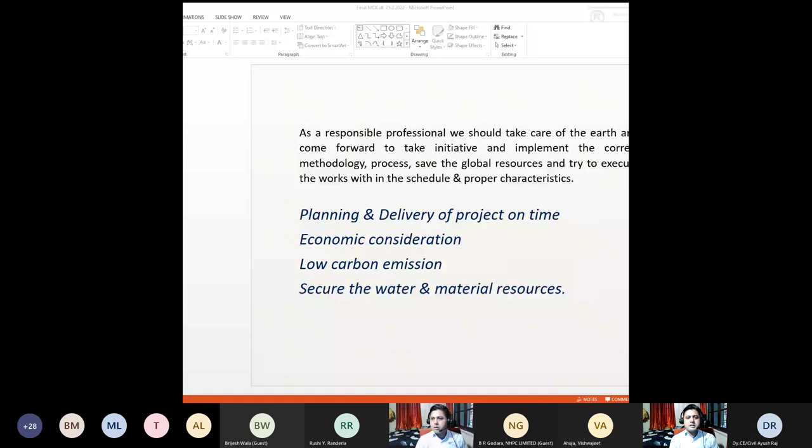Yes, sir, go ahead. Delivery of project on time, economic consideration, low carbon emission, and securing water and material resources - because if we do the projects and don't deliver on time, it is very difficult to sustain in the market, being a contractor, a client, an organization, or a person. If you are the person who can deliver the project with proper planning, proper thought process, thinking, analysis, and root cause analysis, the company and organization can benefit in all respects. So your planning and everything should be considerable, and the methodology, the process should be reusable, and all results should be.

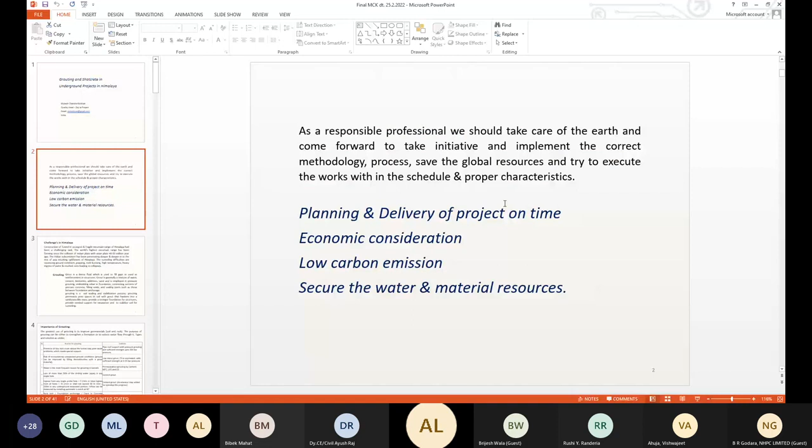Challenges in Himalaya: construction of tunnels in the youngest and most fragile mountain range of Himalaya has been a challenging task. The world's highest mountain range has been forming since the collision of the Indian plate with the Asian plate 40-50 million years ago. The Indian subcontinent has been penetrating deeper and deeper into the rest of Asia, resulting in upliftment of the Himalaya. The tunneling difficulties are squeezing ground condition, popping, rock bursting, high temperature, heavy ingress of water, and crushed zones leading to collapse. These are the challenges while we execute projects in Himalayan terrain, whether it is hydro projects, tunneling projects, metro, or any kind of structure.

So grouting and shotcrete is what I'm going to focus on today - my experience, as a team, as a whole organization, where I have thought it should be done in a proper way or good way. So I will share my entire experience and key details, key experience, which may benefit the industry and the society.

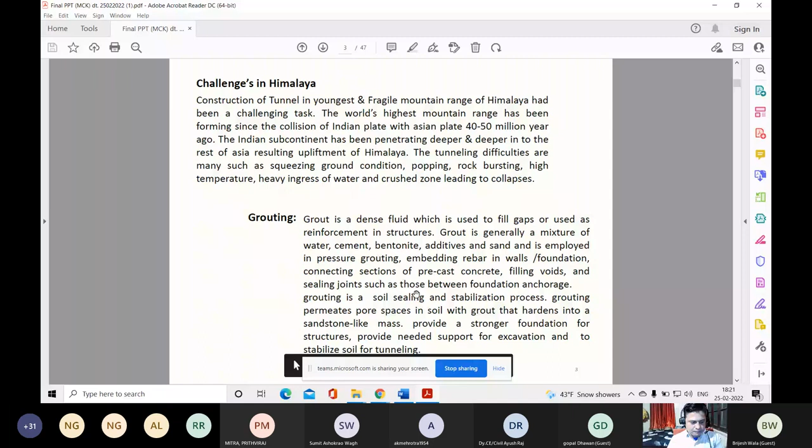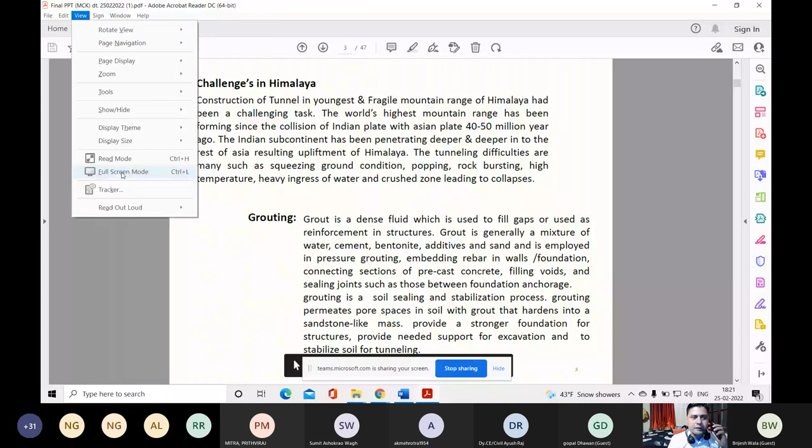Yes sir. Hello. Sir, you are audible sir, you can continue now. Okay okay.

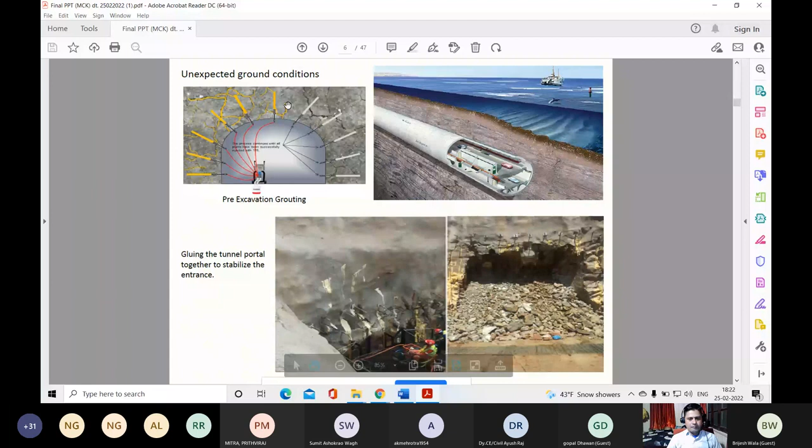Can you go back on previous screen? Hello. Hello. Yes, you are off, move. Yes please move to next slide. Please move to next slide.

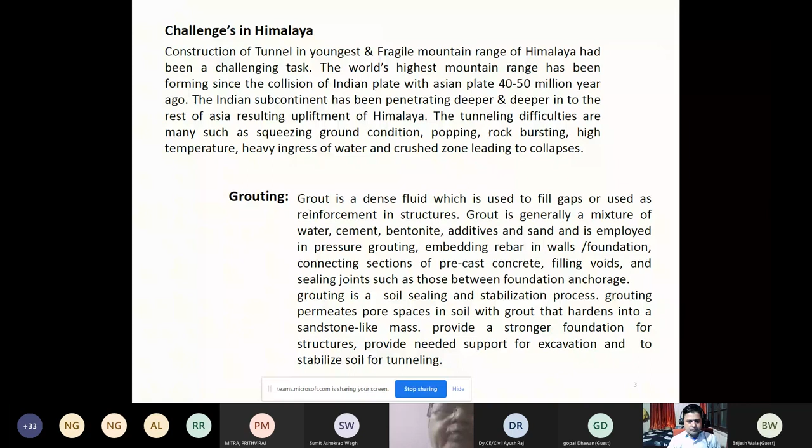Please play the video for ground condition.

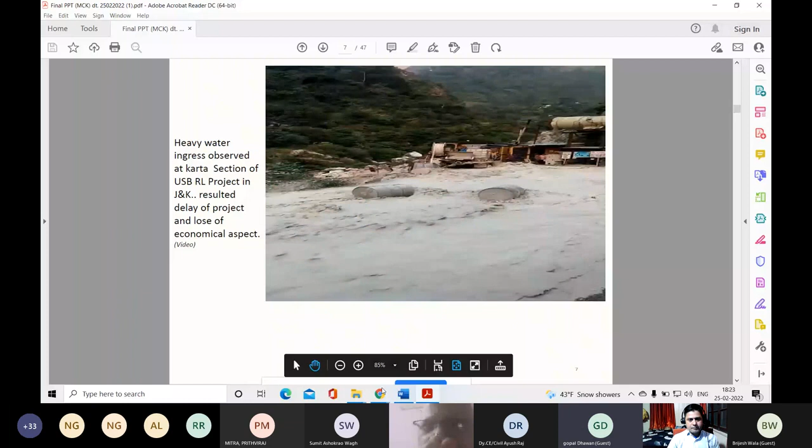Thanks sir, thanks. Due to network problem I am extremely sorry, I got disconnected. Now I am talking on the reason for grouting and solution. The presence of low rock cover needs proper support.

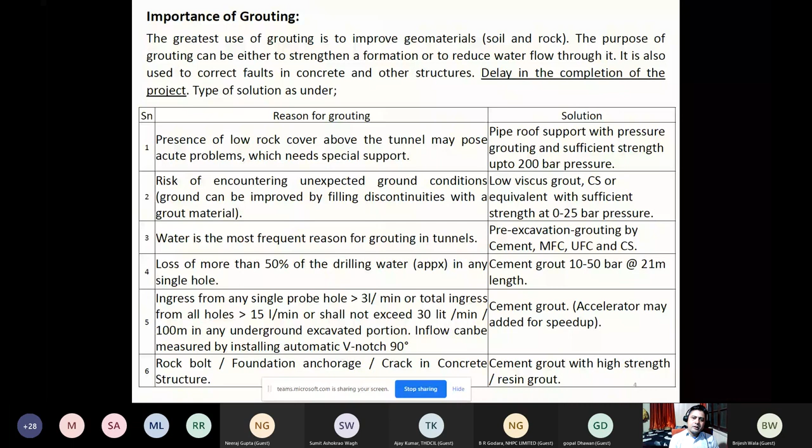So I have seen in some railway projects and RVNL also, there is a good design philosophy and a constructive and faster excavating approach and procedure they are implementing, which you can see.

Just touching the boomer and it is falling down. So whatever condition exists in nature, you have to take the correct pre-excavation methodology, what type of grouting is suitable in that condition, pipe roofing and other elements like RRS, rib and lattice girder, shotcrete, grouting - everything should be done properly.

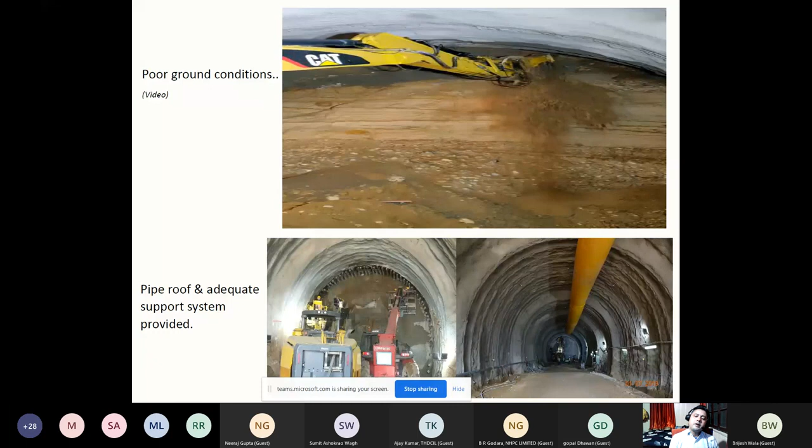You can see the next slide, which is showing the tunnel under the sea. Why do we do tunneling? Because there is no space, no land in Norway. I am talking about Norway, and almost all tunneling there, I think 90%, is going under the sea.

In this condition, we have to implement and go with the grouting. Pre-excavation, you can see gluing the tunnel portal together to stabilize the entrance nicely. The drilling, anchoring and grouting has been done nicely. The face has been excavated in poor ground condition, highly fractured.

It's not only in Norway - in Uttarakhand, Himachal and hilly terrain also, we have to study the condition at the face, whether it is cavity, whether it is solid, whether there are water bodies. We have to take care of nature and the people residing in Himalaya or mountains - they have to survive with water, and the water is key.

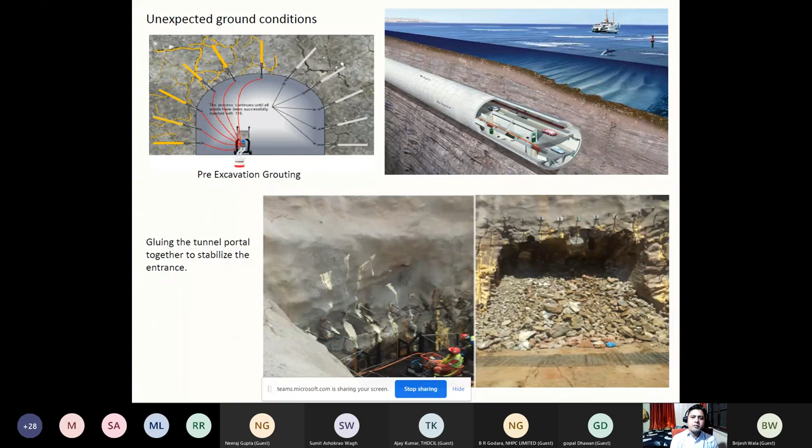Water is a key component for survival, so we have to take preventive measures during tunnel excavation, because water is a hazard for tunnel construction. We have to try the best possible measures to grout it and expedite progress, while also keeping nature as it is, because we are not paying nature back - we are deteriorating it while doing progress and executing works to achieve our targets and goals.

I have a case study of a railway project in Jammu and Kashmir, the USBRL project near Katra, Udhampur. There was a huge water body encountered in the tunnel, and a waterfall was observed inside the tunnel. Maybe the reason was improper planning, maybe the reason was not doing proper geological and water investigation when the tunnel was planned and executed.

So we have to always think before execution what type of challenges and preventive measures need to be taken. This is case study one - when tunnel excavation is going on, no surprises should come. All challenges and unforeseen consequences should be analyzed before the time schedule.

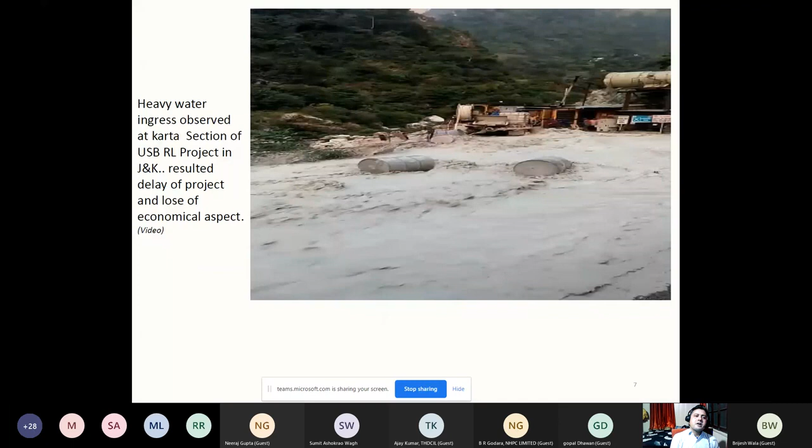Case study 3: in the 90s, excavation of the original headrace tunnel encountered a heavily faulted zone with an overlying river valley, where rock cover decreased to only a few meters with overlying saturated river-borne deposits. At the time of original excavation, a cave-in and severe water ingress were encountered in this zone, leading to tunnel collapse and resulting in heavy project delay. This is the case of Maneri Bhali HEP second stage.

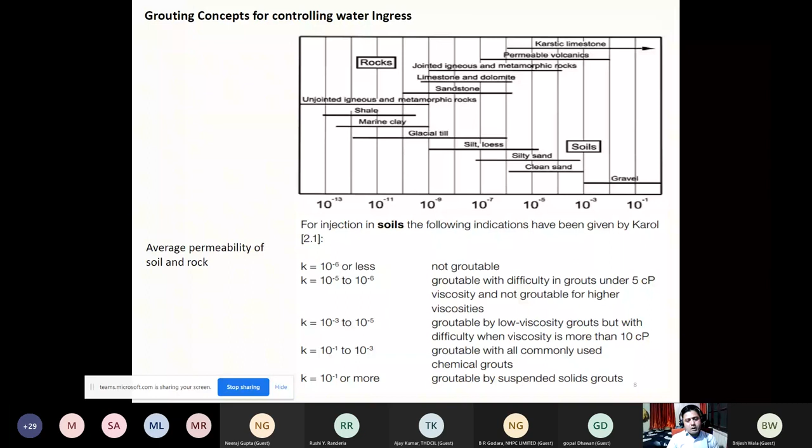We have to drill. You are visualizing on screen this kind of fractured, highly fractured rock. If you go ahead 50 or 100 meters, water bodies may come into the tunnel - maybe a big problem. During excavation, your water may be lost, penetrating into the fissures and holes, so you have to grout it immediately. You have to calculate the lugeon value - you drill and measure the flow rate per minute, pressure, and depth of the hole, and you can calculate the lugeon value.

Another concept is the grouting procedure: how you identify which grout is suitable for which class of rock or soil. If your tunnel face has stone, gravel, sand, or silt, you can go ahead with materials like cement and mortar, or bentonite, sand and gravels. Nothing is required in rock.

If sandy and silty strata is observed, you may go ahead with cement initially. If not possible, you may go with microfine, ultrafine, and colloidal silica, which has been experienced and worked with in recent years. Last two years I have also worked with some kind of grouting specification technology.

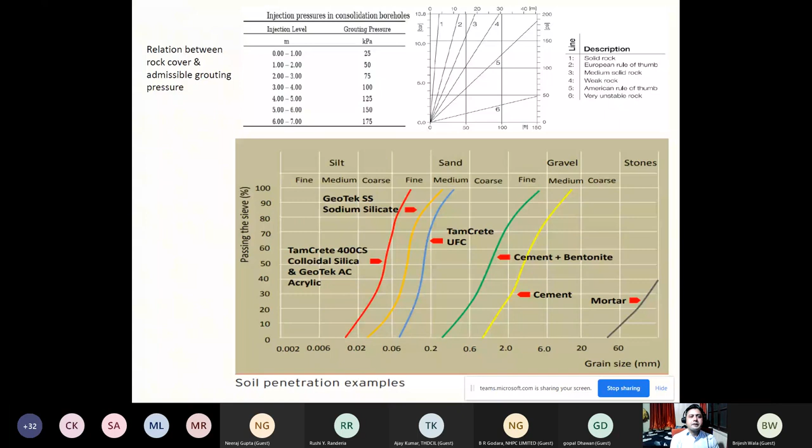There are some soil grouting methods: compacting grouting, permeation grouting, fracture grouting, mixing jet grouting. I will not go into detail, I will be a little faster, because it's just the type of grouting in soil which we are treating and permeating, and which type of material you are pouring.

For OPC, you can treat 0.4 mm size fissures. For 0.1 mm fissures, you can go with MFC. For 0.05 mm, like 50 micron size fissures, you can go with ultrafine.

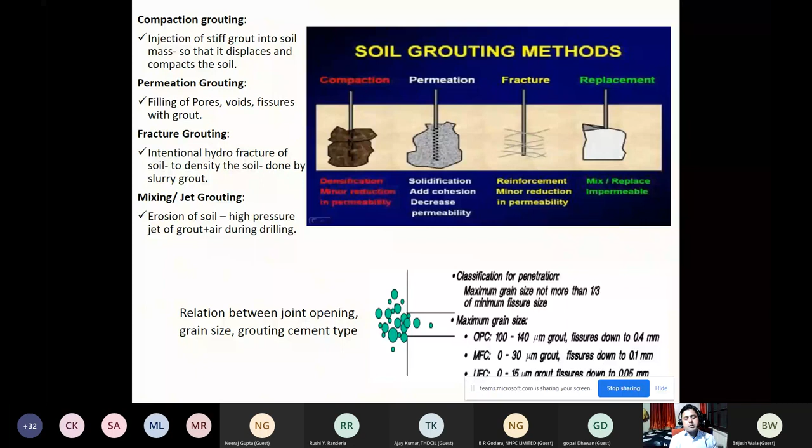Size, again, size is a matter. You can see the funnel, similar to a Marsh flow apparatus, where you put cement, microfine and ultrafine. The cement particles will be higher size, like 50 microns or 40 microns. It will not pass through the tube.

So you need the particle size finer when your crack size is 0.02 mm. If your crack size is lesser than 0.02 mm, the size of material you are pouring, like microfine or ultrafine, matters—microfine is defined as below 30 micron, and ultrafine as below 15 micron. There are other materials on which research is going on.

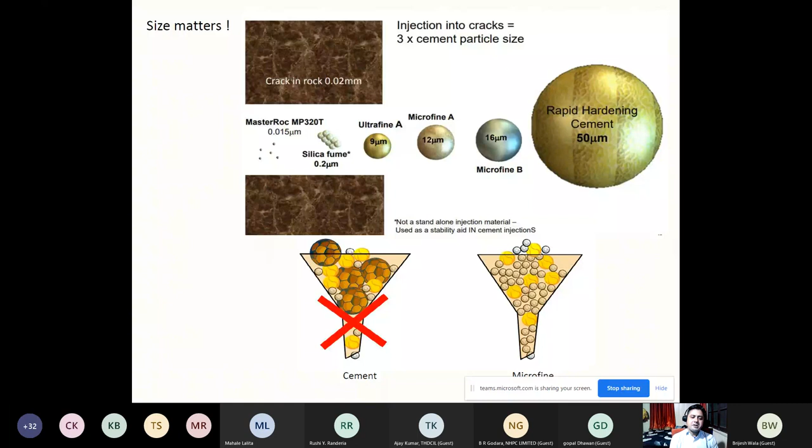So all these materials are beneficial, and you can examine them through rheological tests. What is a rheological test? Stable cement grout behaves like a Bingham fluid. Therefore, both viscosity and cohesion need to be measured to provide a complete picture of the rheological behavior. The most common method of assessing the rheological behavior of cement grout in the field is to measure the time it takes for 1 liter of grout to flow through a Marsh cone or funnel.

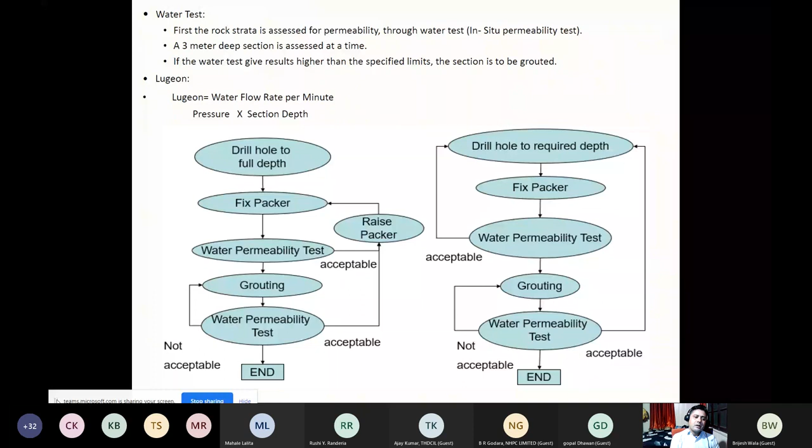Bentonite is used for ground stabilization. Basic purpose of bentonite: liquid limit will be 300%, and pH between 8 to 10.5, swelling by volume 10 to 12 times original volume. Grain size: 0.02 mm more than 85% should pass, 0.2 mm 99.9% pass, and 2 mm 100% should pass.

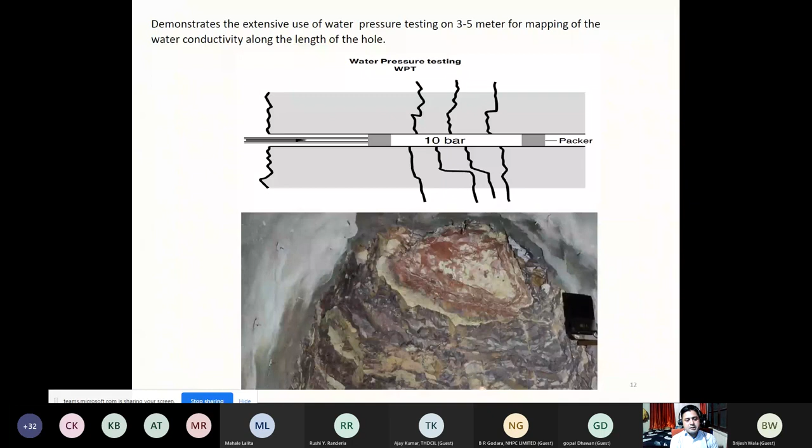Polyurethane is used for consolidation of sheared or disturbed rock, making the ground impermeable against water inflow even under high pressure, with high fire resistance and low permeability, which will produce a low strength grout that may be very difficult for an initial cutoff from running water. Polyurethane can be done, but it is not advisable because it is a waste of time and results from improper planning, because when we do pre-injection grouting through cement or microfine, this condition will not happen, so there's no need to use polyurethane grout.

Epoxy grout we'll discuss again on the next slide, but it is a low viscosity epoxy resin with long pot life, used for crack injection, sealing cracks in concrete and restoring structural integrity.

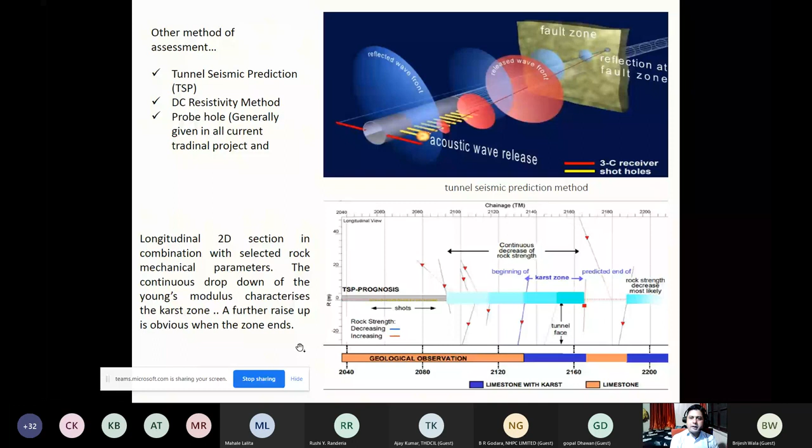Chemical composition: microfine and ultrafine grout is basically cement, but it has the size to determine whether it is microfine or ultrafine. It has the basic percentage of ingredients like C3S, C2S, and C3A, and other parameters similar to this. This table shows microfine and ultrafine properties. Cement is basically the ingredient for microfine and ultrafine purpose of stabilization. Both provide water permeability control and good strength improvement. The difference: microfine D50 will be below 4 micron, D95 below 15 micron; ultrafine below 3.5 and below 12 micron. Specific surface: microfine 600 meter square per kg, ultrafine 900 meter square per kg. The mud balance is similar to density, 1.4 to 1.5.

The Marsh value may vary with different water cement ratio and admixtures. If you increase the amount of admixture plasticizer, your Marsh will be different—Marsh value will be different. This is practical, established data: 30 to 34 is okay for penetration, and the mass flow of 0.8 we have established in past projects. Bulk density for microfine will be 800 to 1500, and ultrafine 500 to 800.

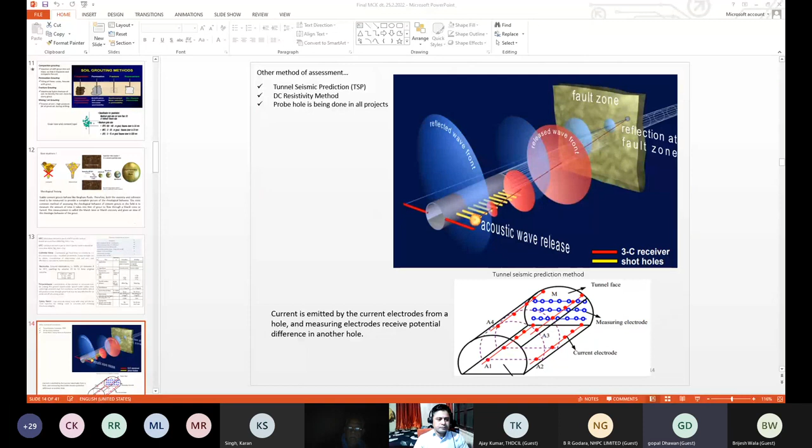We have done so much face study of grain size analysis. We found that sometimes normal cement OPC, below 300 meter square per kg fineness, would not be good for the grouting. So we tried 53S grade, meant for special category like sleepers, which is more fine cement. We did some pipe roofing and rock bolting grouting, but for this kind of strata where fine grained soil of 150 micron size sand exists, we needed to find which grout will be feasible. There we found some bonding between soil and grout was observed, and it was stable at some time, because the stand-up time during excavation is very less compared to rock.

Again, we did the ultrafine grout with the plasticizer PCE chemical at one phase. There were cobbles and pebbles between the particles. It works, but it takes time, like 4 to 6 or 7 hours, and it gives some strength after some period. One sample gave 2.2 MPa, another 1.2, and another 2.2. This is the composite taken from the face sample. You can see this is the flowing grout into the pebbles and gravels at face, poured by the pipe roofing umbrella, and it worked out after 4-5 hours. It was a hardened surface, very hard, and then it was not breaking sometimes even by the excavator. So the ultrafine was successful in that case.

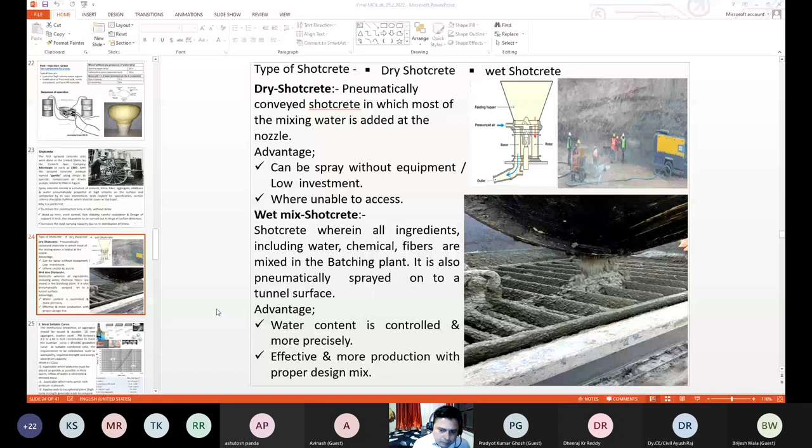Keep coordination with the screen. Now I am on most suitable curve. Are you watching this slide? Can you see this? No, sir, you're still on types of shotcrete, it is being displayed. Most suitable curve, pardon? Yes, now sir, you are on most suitable curve.

Yes, okay sir, this is the mechanical properties of aggregate. We have to always keep in mind when shotcrete has to be designed with proper strength requirement, with parameters for different grades, our gradation curve should fall within the envelope, because if the percentage of aggregate is not coming into the curve, the shotcrete strength and other parameters as per contract will not be achieved. So you have to ensure the aggregate gradation curve falls within requirement.

Then what is J1 class? It is basically applicable when shotcrete must be placed as quickly as possible in thick layers, where inflow of water is observed and stresses occur. What is J2? Applicable when early active rock pressure is present. J3 applies only to exceptional cases. High early strength generally leads to reduced strength increase at later age.

Not in the screen. Nothing, only number 2, most, that is the most suitable curve. After that nothing, what is that? What you are telling is not being displayed. Whatever you are telling. Now it is clear, sir. No, it is there, but what you are telling is not matching the display.

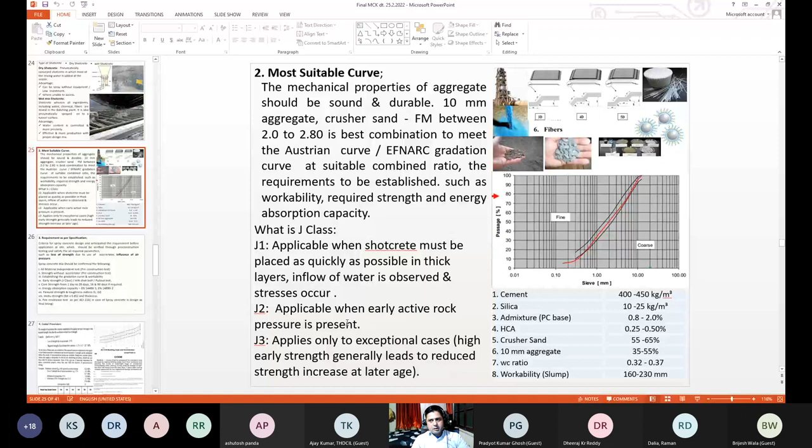Continue, please continue.

Requirement criteria for spray concrete: designed and anticipated requirements before application at site should be verified through pre-construction testing and satisfy all requirement parameters such as loss of strength due to use of accelerator and influence of air pressure. The following tests should be done during pre-construction testing, before use at site: all material tests, independent tests, strength without accelerator to be established, establishing the gradation curve and workability, early strength, Hilti shortboard and pull-out test.

Early strength can be done using the penetrometer, but for the Hilti shortboard and pull-out test, the equipment is not available with the manufacturer. Maybe depending upon the request they may supply it.

Core strength from 1 day to 28 days should be confirmed. The energy absorption capacity as per EN should be confirmed. The flexural strength and toughness indices I5, I10 shall be checked. In situ strength shall be 0.85 of the characteristic strength, and fire resistance as per ACI 216 in case spray concrete is designed as final lining shall be done. So these are all essential parameters to be considered.

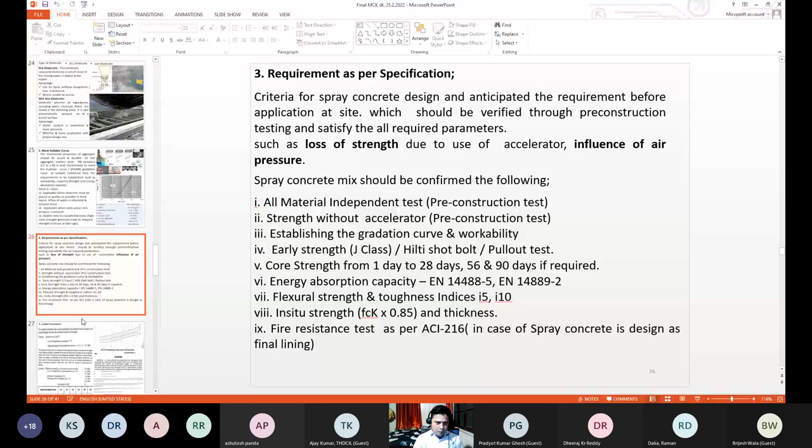So I am now going on to codal provisions. The shotcrete should be considered for loss of strength due to accelerator and due to air. You can see the screen.

There are Austrian guidelines and European codes stating that 15% loss will occur due to liquid accelerator, and 10% loss due to the influence of compacting. So a 25% overall percentage of reduction will be considered.

For example, if your strength grade or class is C30, it should be 38 MPa at 28 days. This is the J1, J2 which we discussed earlier, and this is about the ACI 318 code, which states that if 40 MPa is the grade of shotcrete, the cube strength should attain 40 MPa, 0.8 should be attained on cylinder, and 0.84 should be attained in in-situ sample.

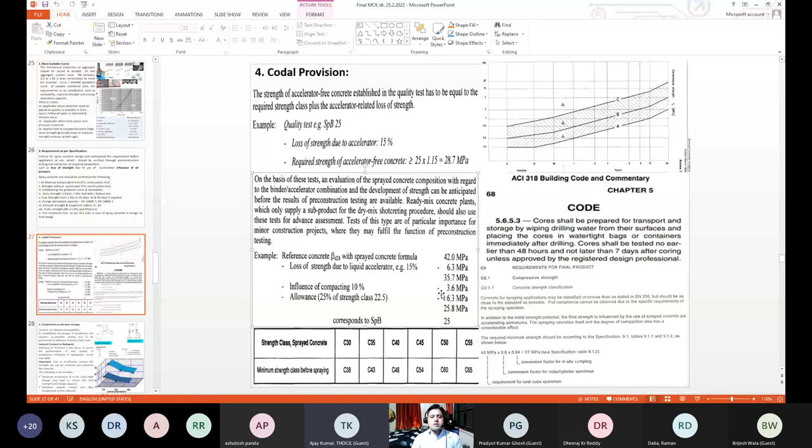Now I am on established accelerator doses. While designing the shotcrete mix at the lab, we should keep in mind that the accelerator should be used at appropriate doses. If accelerator is used more than the recommended doses, your strength will be higher and shotcrete operation will be okay, but the shotcrete will be in a burning stage, and later on the strength will not be achieved in situ. So you have to establish this through the Vicat apparatus or Gilmohr apparatus. The recommended setting time for shotcrete is maximum 4 minutes, which should be desirable and acceptable.

Cement content versus rebound: rebound of shotcrete is a key factor to assess the performance of the mix, quality of accelerator, efficiency of equipment, and nozzle man skill. All work together to achieve good results. Due to insufficient cement, strength cannot be achieved and rebound is influenced. The following should be considered: optimum accelerator to be used, as high doses may lead to reduced final strength, and optimum cement content with silica doses helps in less rebound.

This statistic is about cement: if you use more than 450 kg cement, that will be economical wastage, but your rebound will be found at wall 7% and at crown 15%, meaning overhead rebound at 15% with 450 kg. If your cement content is lesser, 375 kg, then your wall rebound will be slightly higher at 16%, and overhead may be 29%.

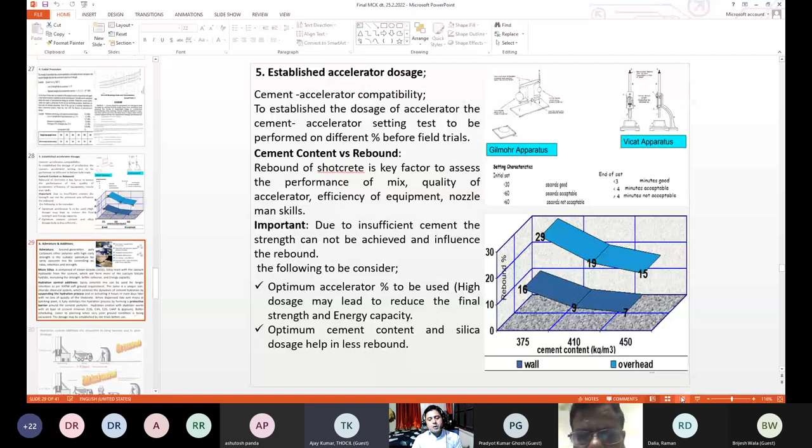Now I am on admixture and additive. I will not go in details, just go a little faster, because admixture you all know about. The second generation polycarboxylate or naphthalene based chemical with high early strength is the suitable admixture for spray concrete mix for controlling WC ratio, retention and strength.

Microsilica is composed of silicon dioxide. Silica reacts with the calcium hydroxide from the cement, which will form more calcium silicate hydrate, increasing the strength, better cohesive and energy capacity.

When dispensed into the mix at the batching plant, it fully stabilizes the hydration process by forming a protective barrier around the cement particles. Hydration control with stabilizer works with all types of cement material, C3S, C3A, C2S. It allows better scheduling and easier planning.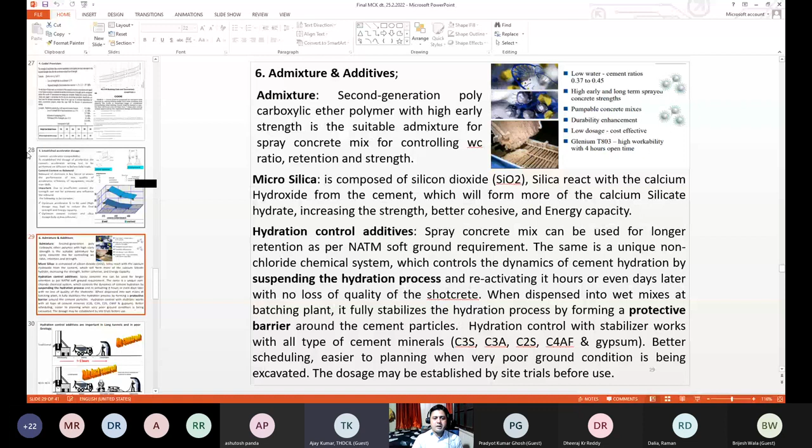When very poor ground condition is being excavated, the doses may be established by site trials before use, and you can assess the final results after establishing the same through field trials, which may be called field suitability trials. Now, hydration control additives are important in long tunnels and in poor geology.

Traditionally, you can see the batching plant is near and you have to spray immediately within 1 to 2 hours. But with the HCA, you can go up to 3 to 72 hours. You can make the mix at the batching plant and put the hydration control additive spray at site as and when required.

Because in NATM soft ground condition, the shotcrete should be prepared and readily available at site while spraying the excavating face. Once, or in case of any failure or problem persists, then you can immediately spray the shotcrete over the ground. So this is the advantage of HCA, hydration control additives.

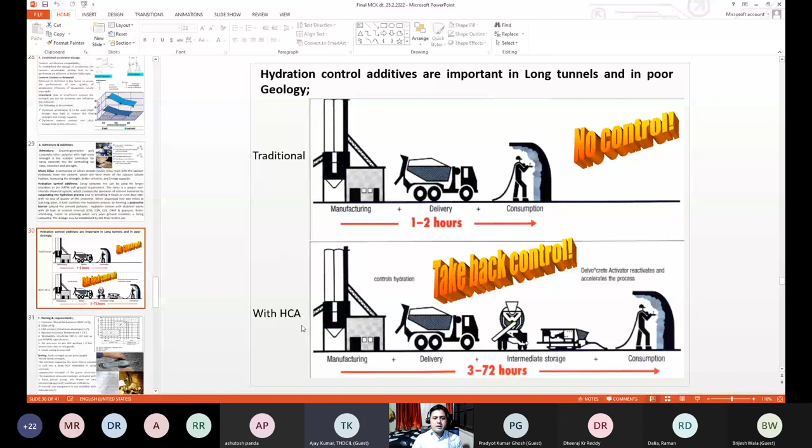Now I'm on testing and requirements. Fineness should be between 3,500 to 5,000 square centimeters per gram for cement. C3A content should be more than 7%. Spray shotcrete temperature should be more than 13 degrees centigrade. Workability should be 160 to 230 mm as per EFNARC.

It has been mentioned, air pressure, you have to, as a better engineer and a good shotcrete operator, keep the optimum pressure always. Where the rock class is good, keep 6, 7, 8 bar pressure for shotcrete, and if poor rock condition or geology, he takes the decision, and 2, 3, or 4 bar is sufficient.

Initial curing is essential. Testing early strength as per photograph, tensile bond strength. This method measures the force that is needed to pull out a draw bolt embedded in spray shotcrete or concrete. Compressive strength of green shotcrete.

The maximum pressure readings, activated with hand piston pump, are shown on two pressure gauges with maximum indicated pressure. Equipment is not available with every manufacturer, but depending upon the requirement, they may provide you. It is for tensile bond strength of the shotcrete, which we previously used. Accelerator use and field suitability trials.

Accelerator, high performance alkali free accelerator for spray concrete, 4 to 8% to be used. Panel not to be moved from site before 18 hours, because due to disturbance and improper setting or delay of setting, the panel may get damaged, or your sample may give you incorrect value.

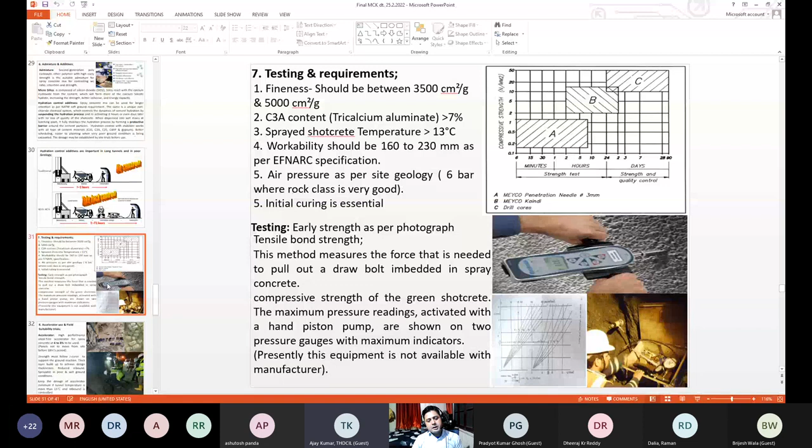Presently, at our site we try accelerator on the higher side, but it is not a good practice. Once the temperature is okay for the site or surrounding atmosphere, then you can keep the temperature of accelerator around 15-20 degrees. If it is okay, then you can use the optimum dosage of accelerator. Your optimum dosage will give you the best results.

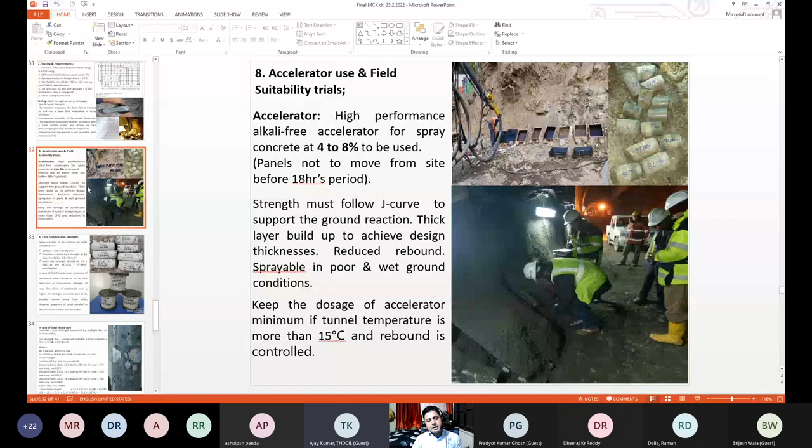Now, the core compressive strength. You know, the 28 days strength should be FCK plus 1.15 during the execution. The shotcrete routine core strength at 28 days should be FCK plus, like 30, 32, 33, it is okay.

But the strength should be FCK into 0.85 as per ACI 318 EFNARC specification. In case of steel inside the core, presence of transverse steel causes a 10 to 15% reduction in compressive strength of the core. The effect of embedded steel is higher in stronger concrete, and as its location moves away. However, presence of steel parallel to the axis of the core is not desirable.

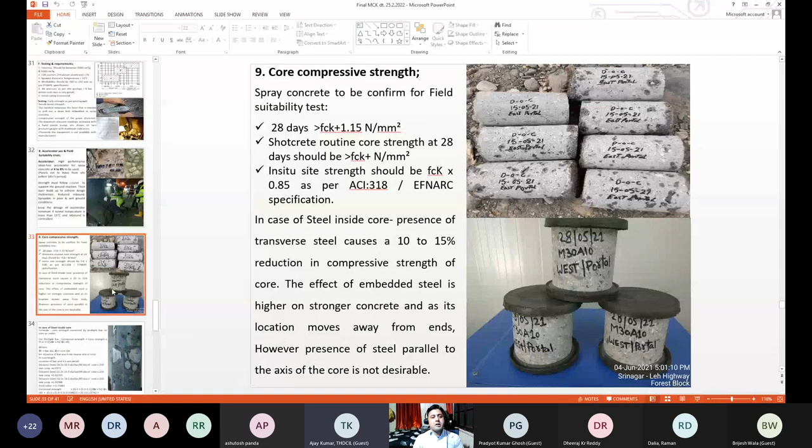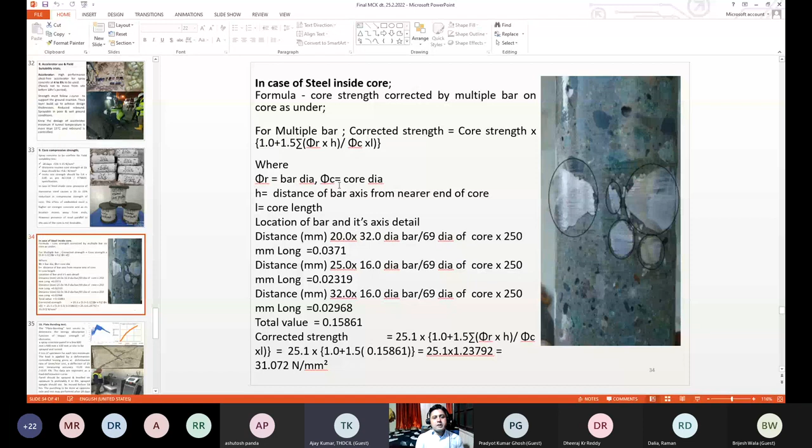Now this is the plate bending test. The plate bending test serves to determine the energy absorption function as impact strength of shotcrete. A spray concrete panel in a box 600 into 100 mm side is to be spray tested. At least 3 specimens are to be tested. The load is applied by deformation controlled testing, pressed at a deformation rate of 1 mm per minute.

A deflection of 25 mm, with measuring accuracy of 0.01 mm and 0.01 kilonewton as the machine tolerance. The data are represented as a load-deformation curve.

The panel should be sprayed and levelled at optimum percentage, preferably 4 to 8%. The spray sample should not be moved before 18 hours. The punching is to be done on the opposite side, and the test may be performed after 28 days, not earlier than that.

You are visualizing the load upon displacement. It comes directly on the screen of the machine, and you can calculate the energy, or the machine shows the energy directly, because well distributed fibers give you better energy.

In case your accelerator dosage is perfectly okay, your fiber is well distributed, and your finishing is good, you can achieve good energy, and the results can be calculated. The energy is basically the area under the load curve. So we are doing this practice, and the sampling and testing procedure is being implemented.

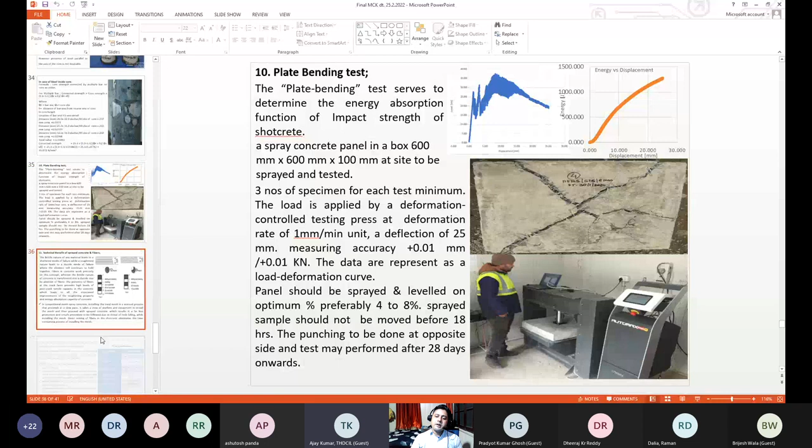What is the benefit of it? The technical benefit of spray concrete and fibers: the brittle nature of any material leads to a sudden mode of failure, while a toughened nature leads to a ductile mode of failure, where the element continues to hold together. Fiber in concrete works precisely on the concept wherein the brittle nature of concrete is transferred into a ductile one by addition of fiber. The presence of fiber at the crack faces provides a high level of post-crack tensile capacity in the concrete, which leads to associated improvements in the toughening property and energy absorption capacity of concrete.

In conventional mesh spray concrete, installing the steel mesh is a manual process that proceeds at a slow pace. It takes a crew of workers and equipment to install the mesh, and then proceed with spray concrete, which results in a far less productive and unsafe procedure due to the threat of rock falling while installing the mesh. Direct mixing of fiber in the shotcrete eliminates the time consuming process of installing the mesh.

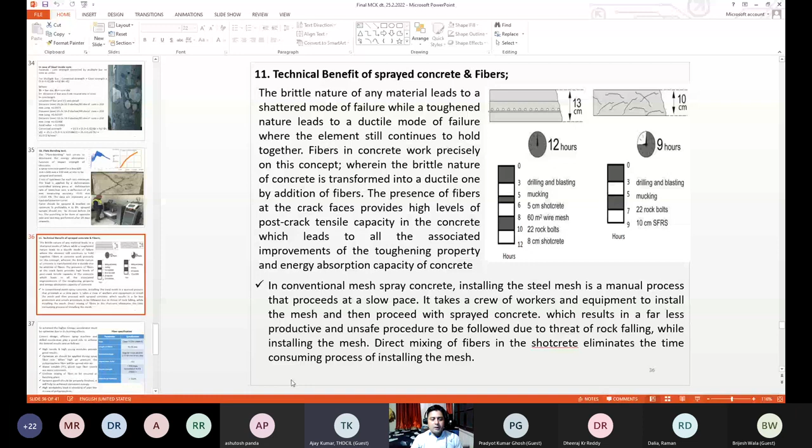Now you know that to achieve higher energy, accelerator must be optimum due to its burning effect. Fiber specification: which fiber is generally used? Class 2, 45 to 55 mm length, cross sectional shape 0.3, and aspect ratio should be more than 64. The tensile strength of the fiber should be more than 500, and the modulus of elasticity should be more than 5 GPa.

Its benefit: high tensile strength and high Young's modulus provide good results. Optimum air should be applied during spray fiber mix. With high air pressure, the polypropylene fiber will be sprayed into the air. Water soluble PF glue-type fibers and steel fibers are more consistent.

Steel fiber with the glued type is better than other non-glued fibers. Uniform mixing of fiber must be ensured at the batching plant. Spray panels should be properly finished, which will help achieve consistent energy. High workability leads to choking of the pipeline in case of polypropylene fibers.

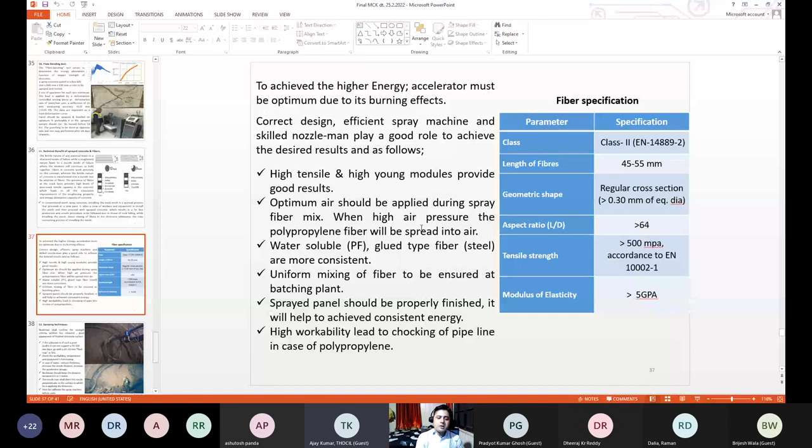Spraying technique: the nozzleman shall confirm the strength criteria to achieve less rebound and good appearance to finish the shotcrete surface. If the substrate is of such poor quality that it cannot support 50 to 100 mm layer, go with a 20 to 50 mm flash coat first. Check the workability, temperature, and equipment functioning.

In case of water, reduce thickness, increase the nozzle distance, and increase the accelerator dosage. The nozzle should keep a distance of between 0.5 to 1 meter. The nozzleman shall direct the nozzle perpendicular to the surface to which he is applying the shotcrete. The spray machine must be calibrated before use.

You can see how the operator is spraying, maintaining the proper distance and angle, and a perfect spray is observed when you have a good, skilled, and certified nozzleman.

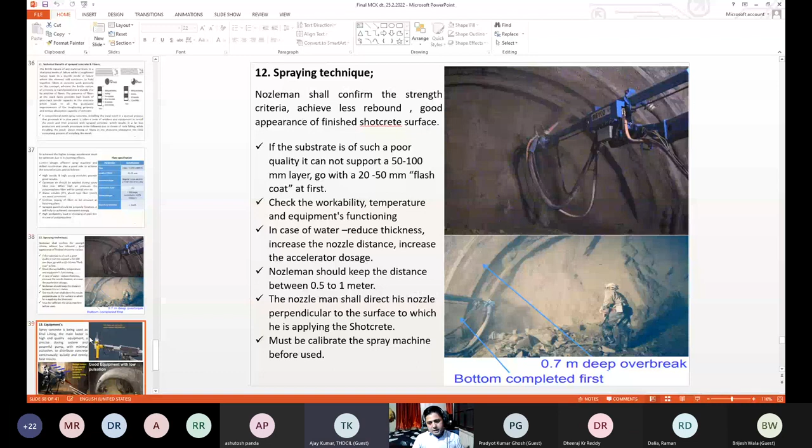Also, equipments. Spraying concrete is being used as final lining. The main factor is high-end quality equipment, a precise dosing system, and powerful pump with minimal pulsation to distribute concrete continuously, quickly, and evenly for best results. You can see the machine has 360-degree rotation of the nozzle.

The distance from the surface to nozzle should be 0.5 to 1 meter, and the angle should be perpendicular to the face. Good equipment gives you low pulsation and good results, as per what you can see on the screen.

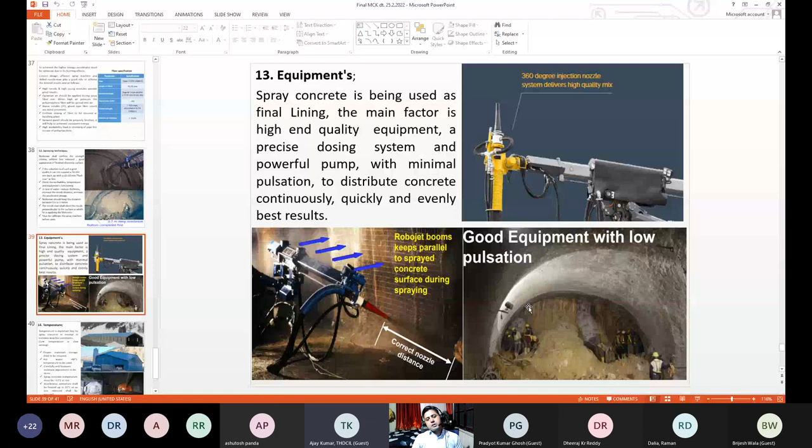Temperature is a very important factor in shotcrete. If your shotcrete is not hardened, your strength will not be achieved. Temperature is the most important key for spray concrete in normal or extreme weather conditions. Low temperature means slow setting. Proper material storage has to be ensured.

Hot water should be more than 60 degrees centigrade temperature, to be used carefully, and frequent moisture adjustment to be done regularly. Spray concrete temperature must be plus 13 degrees centigrade at site. Accelerator admixture shall be heated up to 20 degrees centigrade so that less rebound shall be ensured.

A real case study and implementation of controlling the shotcrete temperature and other parameters in extreme weather condition. As you can see by this visualized video, at minus 24 temperature you can plan a good shotcreting activity with proper quality control.

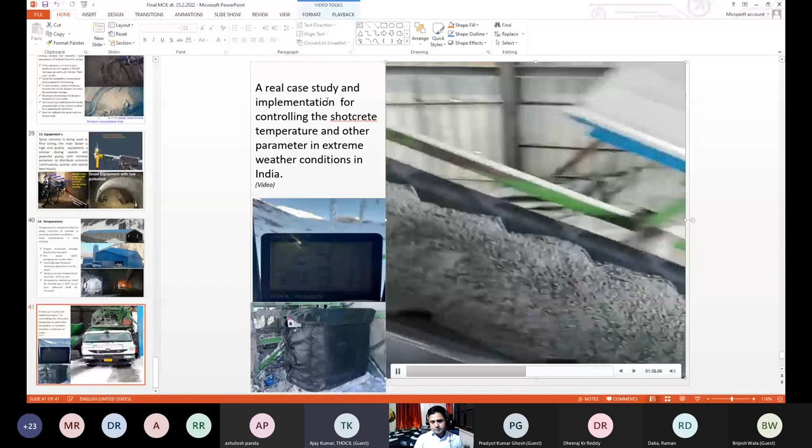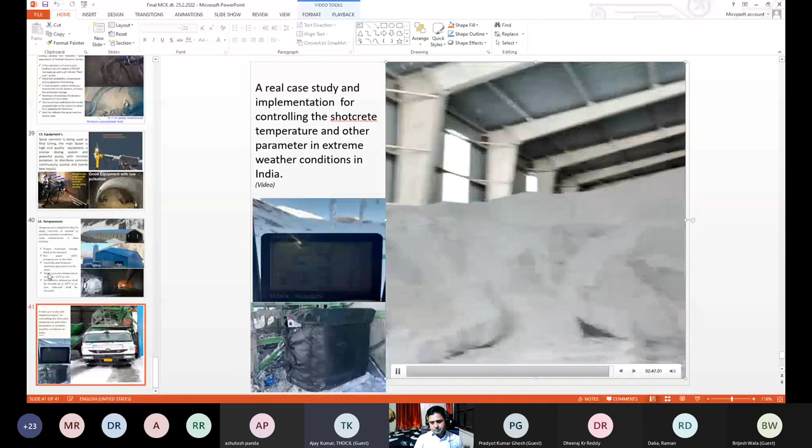Hello. Hello. Yes, sir. There are some doubts in the comment section. So I'll just read them out to you. Okay, sir, I'll just start from the beginning.

Mr. Ranganathan is asking, is there any minimum strength requirement for various grout mix? It depends upon which grout mix you are going to perform. Like pre-injection grouting, there is a strength criteria of 20 MPa that should be attained. If you are going to fill the fissures, cracks and voids, that should attain 20 megapascal. If you are going with microfine, ultrafine or other colloidal silica, it gives hardly 5 to 10 MPa strength at 28 days only.

Okay, okay, thank you sir. Thank you. Mr. Ranganathan has one more doubt: can you please suggest brands of ultrafine slash microfine cement available in India?

Ultrafine and microfine are available from some manufacturers in India. However, every manufacturer does not make microfine, ultrafine, or colloidal silica. Some manufacturers make colloidal silica, some make ultrafine. Like Mapei has a manufacturer who has ultrafine like Microsem 9000, BASF having the 650 and all kinds of material. They have microfine, ultrafine, and also colloidal silica.